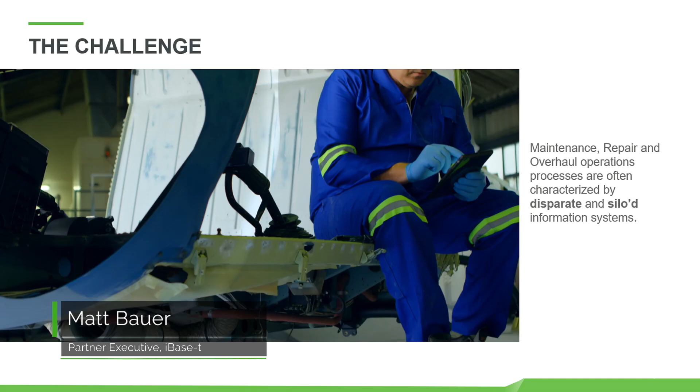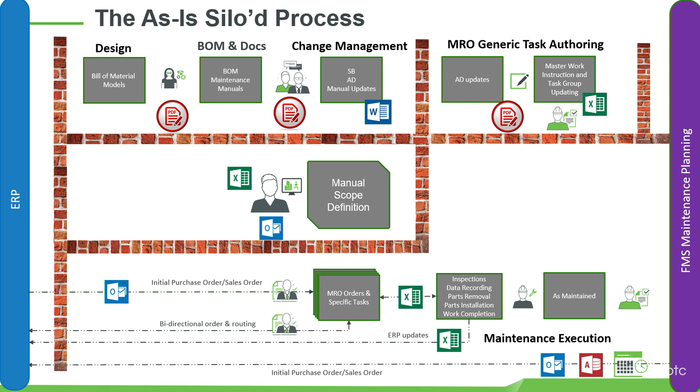The challenge faced by many MRO organizations today is essentially siloed, disparate information systems. It's not at all unusual that many systems of record are simply integrated through PDFs, Excel spreadsheets, and email messages, and unfortunately, when you've got this level of manual recreation and reentry of data, you get a lot of redundancies, which extends both the planning and execution phases of MRO. Inaccurate data leads to inefficiencies. This kind of situation can represent as much as 3 to 5% of MRO revenue today.

We worked with PTC to envision a solution that utilizes both portfolios in order to create smart connected processes that allow us to overcome the manual inefficiencies these organizations face. That solution is comprised of a combination of Windchill PLM, which is the product that manages the superset of tasks, requirements, certifications, etc., required to maintain the product.

It incorporates ThingWorx as a composite application, where we're using it to essentially mash up data from our Windchill PLM, along with data extracted from an FMS system or fleet management system that contains asset history and telemetry.

Our execution engine is Solumina. Solumina's job is to present instructions, enforce work procedures, and capture audit trails and all associated data that goes along with the repair operation itself.

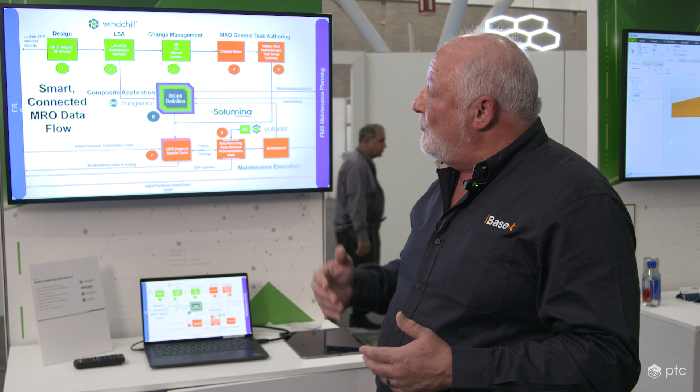When this change occurred, in this case we're going to be replacing magnetos on the engine, that kicks off a variety of activities. The first activity will be adding those instructions for removal, addition, and repair inside Windchill itself. That will kick off what we call a service bulletin, an indicator to all parties involved of how the instructions need to be carried out. In this case, because it's a safety issue, it's also going to be issuing an AD, or airworthiness directive, which is essentially grounding the airplane until that application is done.

So what we see up top in terms of the flow is that generic process plan of getting those instructions into Windchill itself, kicking off the service bulletin activity that updates the generic task planning. Those instructions have to be communicated to the execution engine, and it's done so in a generic way.

Once all of that activity is completed, we turn to a very specific application of the service bulletin for a particular tail number. That's where our scope definition application in ThingWorx comes in, combining the LSA BOM information with the FMS asset history to give us the specifics needed for this particular MRO operation. That is pushed to Solumina as a work order.

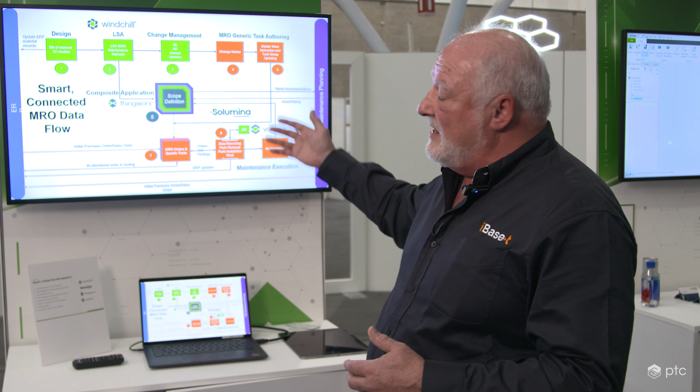And then all of that as-maintained information that's been updated in Solumina is made available back to the FMS or back into our composite application, so the as-maintained data can flow back into any application you desire. What you see here in the blue connected lines are actual integrations.

The red dotted lines in this case are integrations to outside systems, and you'll notice one purple line. The significance of the purple dotted line is that, in addition to being able to scope the actual application or repair operation, we can make recommendations back to the FMS. Think of it like an OEM giving you a notice that your car, based on mileage, needs the brakes changed. It's a similar concept, but it gives the MRO provider the opportunity to be more proactive in making recommendations regarding additional repair activities that might make sense during that event.

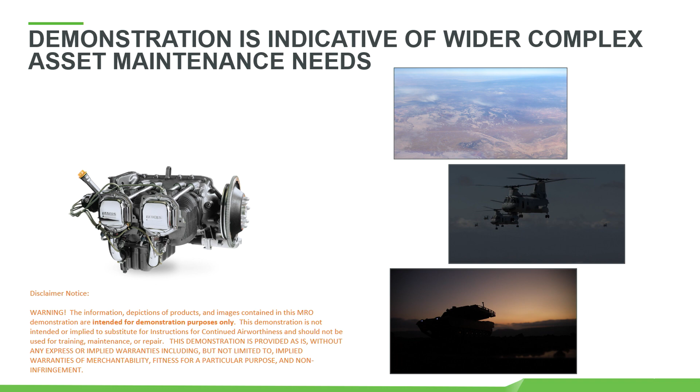So summarizing this down even more from the simplified data flow into essentially a breadcrumb trail: this will tell us where we're at each stage of the procedure I'm about to walk you through. This is all about the magneto replacement on a Lycoming IO360 engine. The fact that this is more of a civilian asset makes no difference from a procedure standpoint—the same processes and procedures are applicable in commercial aviation, federal, and defense aviation activities as well.

So the first step here is, now that the OEM has determined this repair procedure needs to take place, we're going to walk through updating the LSA BOM. What you see on the screen are just the steps you're about to see in the application when we run it. Everything in bold is the steps you're going to see. There are a few that aren't in bold that, for the sake of time, we're not going to go through, but you can assume they have happened.

So we're going to check the EBOM itself, work to include the design change, and analyze that LSA candidate to determine what we need to put into the LSA BOM. All the activity around task analysis, generating the KPIs, and creating task requirements we'll assume has occurred, and then we'll create our maintenance task.

You'll see that in the application. We'll create our task content, and assign any required tools, spares, and subtasks to the LSA BOM, so we have a complete record of everything needed to complete this repair. In the final stages, things like generating the technical publication or exporting the scope definition—we're not going to show that now, but those are all pieces of this process.

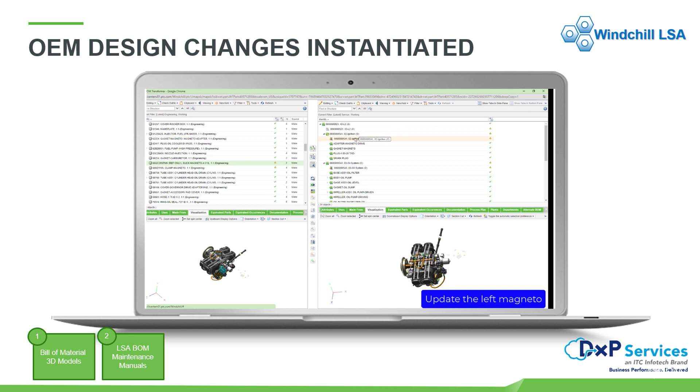So what you see right now is we're accessing the EBOM. We're hunting down the left magneto, and we're going to update it. In this case, we've selected that, and we'll now go through and begin to update the actual procedures. So there we've got the magneto defined.

We're now going to go in and identify all of the candidates that need to be changed as part of this process, going through and selecting the various tasks that need to occur. We'll then create each of those tasks within the application—in this case, entering the information regarding the oil filter change, the magneto change itself, and any additional operations that need to take place.

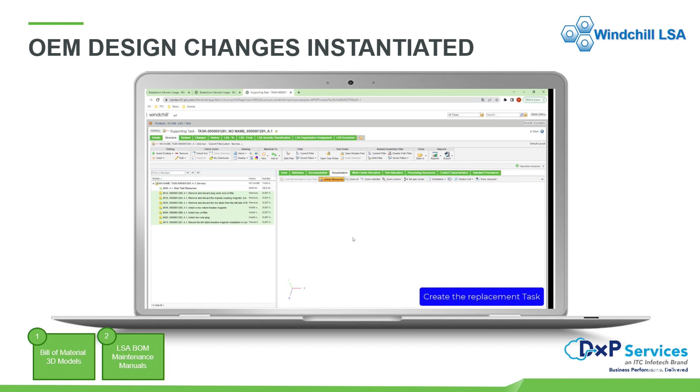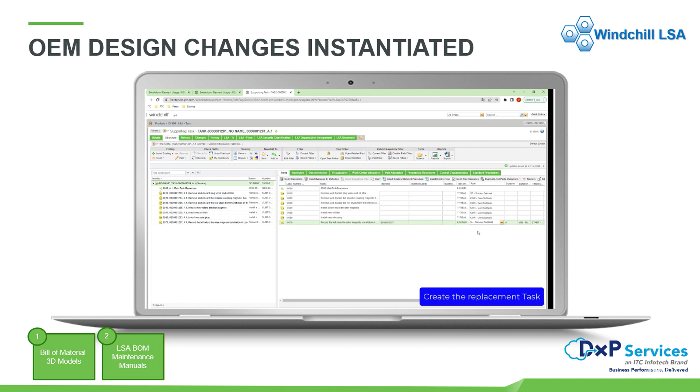We'll copy those—these are essentially the instructions for how to actually conduct the repair itself. So those are instantiated in the application. We'll identify the subtasks associated with all of these, so the complete record of what needs to be done is presented to the technician, creating the replacement task itself.

Now we'll be assigning the spares and tools associated with the magneto repair, essentially documenting each step, inputting the instructions, capturing all the information that needs to be captured, and adding the new tool—in this case, a smart torque wrench. We've now confirmed that all of that input has been successful.

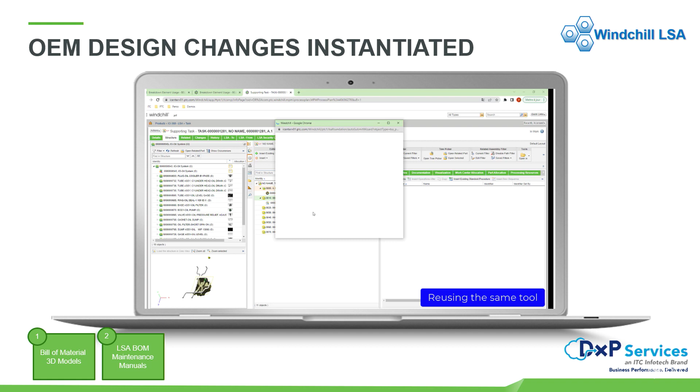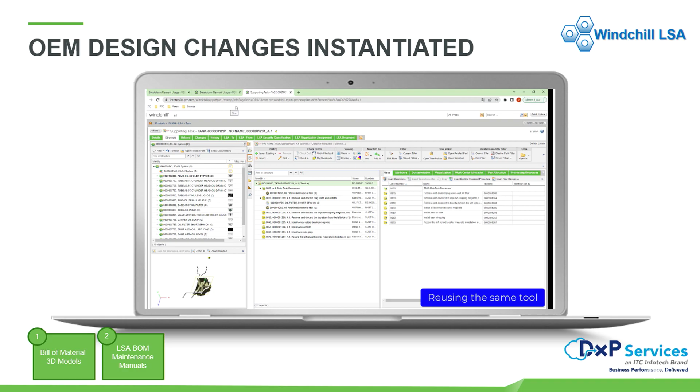We'll add another tool, essentially reusing some of that data the same way, and finalizing here in a minute. All right, so we're completed. Essentially what we've done now is update the LSA BOM with all the required tools and instructions—everything the technician needs to know in order to conduct the repair.

As a result of that, there's a service bulletin that's issued. The service bulletin is the detailed instructions issued by the OEM on how to conduct the repair. In this particular case, because it impacts a safety feature of the engine, the FAA gets involved, and an ICAD is issued.

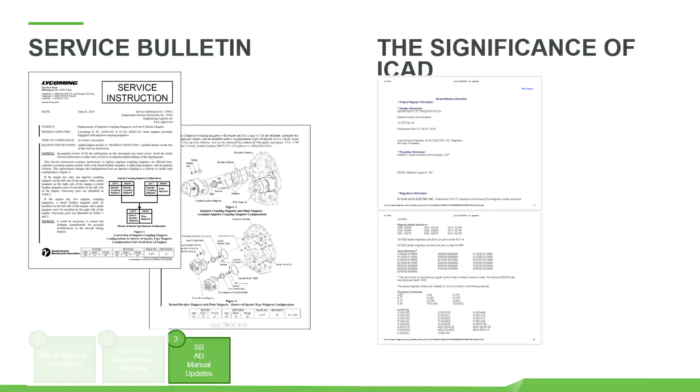The ICAD is an instruction for continued airworthiness directive. Essentially what that means is the aircraft would be grounded until that repair was completed. So there's a sense of downtime and timeliness to the repair that needs to be completed.

Once that service bulletin has been issued, Windchill issues a change notice to Solumina. Essentially, that change notice contains all the information necessary for Solumina to incorporate those task instructions, the generic task instructions on how to replace the magnetos, inside the execution engine itself.

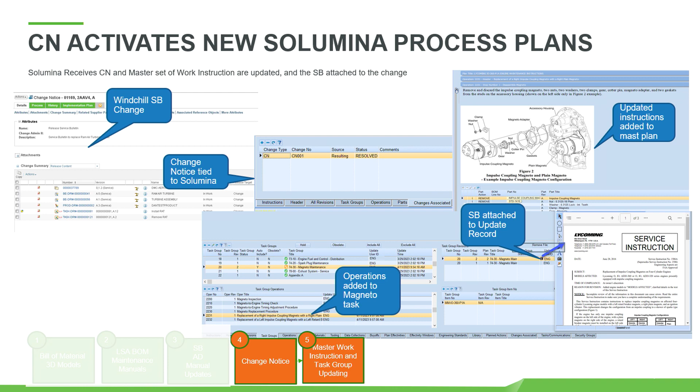So as we can see, the instructions have been added to Solumina in terms of how to conduct the repair, and our process plans have been updated in order to reflect all of the required operations that need to be completed, as well as incorporating the service bulletin itself for access by the technician.

So now that we've completed, if you will, the generic update process, the generic update of the LSA BOM in Windchill, the generic update of task instructions in Solumina, now we want to zoom down and apply those instructions or those repairs to the specific assets that have been affected.

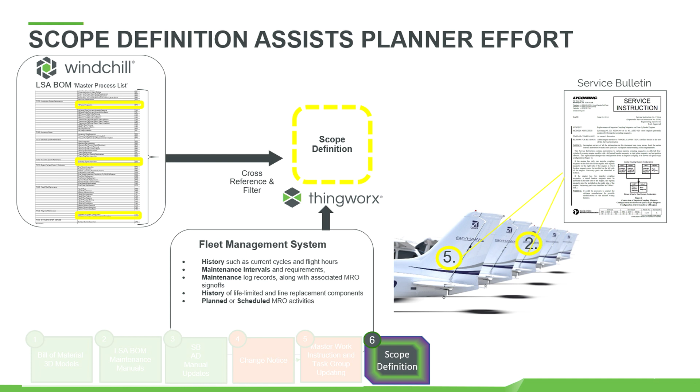In this case, what we know is that the LSA BOM is the master process list of everything that has to occur. In the fleet management system, we have a complete history, current cycles, flight cycles, flight hours, maintenance intervals, maintenance log records, a history of all life-limited parts and line replacement components, as well as any planned or scheduled MRO activities. So that service bulletin, we're now actually able to zoom in on the particularly affected tail numbers that are affected by this particular service bulletin.

So now we're going to step through this process of scope definition using the ThingWorx composite app. What you see here are just the steps that you're about to see in the application itself. We're going to refresh it first to display any of the upcoming fleet maintenance activities.

We're going to see that there are 4 upcoming events. Obviously, a service bulletin takes priority in this case. We'll select the affected tail number that's been identified. You'll see the macro information at the top of your screen.

You also see a display of all the line replacement and the life-limited items at the top of the page. We'll then drill down into each of the magnetos to show you the component maintenance history on each, so you can actually see what the maintenance history on these particular magnetos have been.

We'll then refresh the task group for that tail number, and that'll display our next set of tasks that are going to be required to be executed, and then we'll push that to our execution engine.

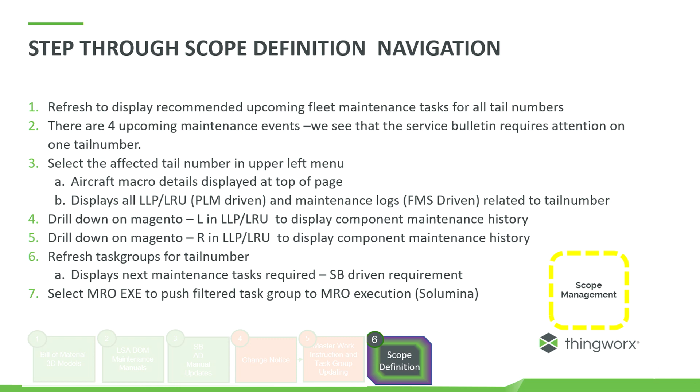Now this runs relatively quickly, so we're going to refresh the task groups. It comes up with our 4 events. We see the service bulletin. We're clicking on the affected tail number. We're then drilling down, essentially in each of these cases, into the particular item that we're looking for, which in this case is the magneto replacement.

And we can see that the history on the left magneto, when it was last replaced. We can also pick up the history on the right magneto. And then once we've seen what that information is, this is the task that we want to complete, we use the MRO EXE button there to push that information down into Solumina for execution at the MRO facility.

So all of those tasks have now been, if you will, the tasks that are going to be required. Could be some pre-tasks that are associated with the repair that makes sense to do at this particular point in time because of their condition or their flight hours, etc.

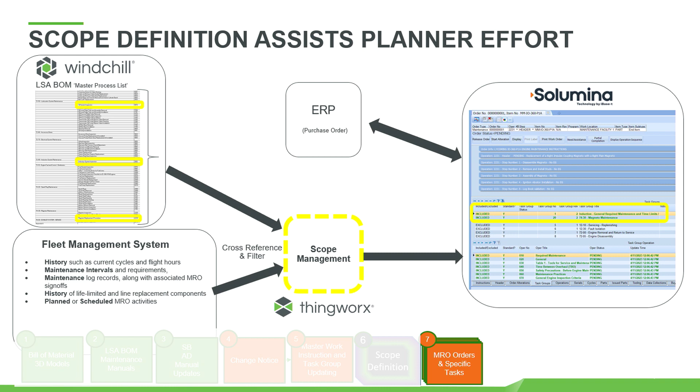All of those tasks have now been instantiated in Solumina, and Solumina then requests the work order from the ERP system in order to kick off the financial piece of the process as well, issuing a work order and preparing for the actual execution of the MRO event.

We're now going to move directly to what the technician is going to see during the MRO execution process. We're going to start with the right magneto, and then we'll work through the left magneto. The right magneto is the simpler of the two, and will utilize Solumina's work instructions in order to guide the technician through the process. So you're going to see him sign in into the application.

You're going to see that the service bulletin is available as a pop-up within the application. You can see the instructions for the removal and replacement of the right side magneto, the fact that we're going to collect a serial number. We're going to work through the steps of replacement.

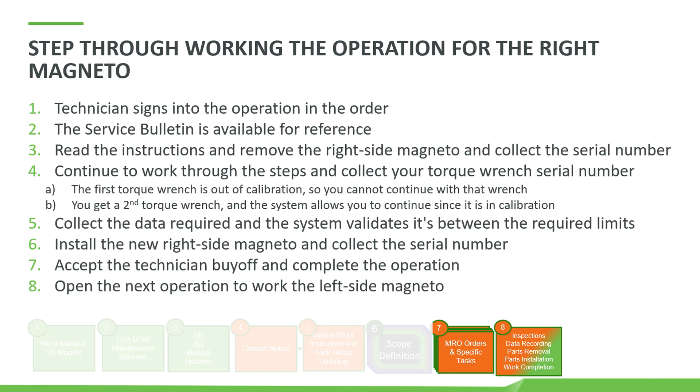We're going to utilize a specific tool. In this case, the first tool that's selected requires a calibrated torque wrench. In this case, the first tool that's selected has not been calibrated. The application will alert the technician to that, requiring him to pick a separate calibrated torque wrench, which is then used.

We'll collect the data from the serial number of the piece that went off, the serial numbers of the pieces that went in, and then we'll complete the buy-off process, and then we'll open the next step of the application, which will take us to the left magneto and introduce our AR experience.

So what we're seeing here is the operator has logged in. You can see the service bulletin is presented. It can pop up so that all the OEM instructions are available via the service bulletin, the official instructions, so to speak.

We'll now view the instructions for disassembly. We're going to capture the serial number. That serial number can be captured either by typing it in or by a scanning process, depending upon how you decide to enter the data.

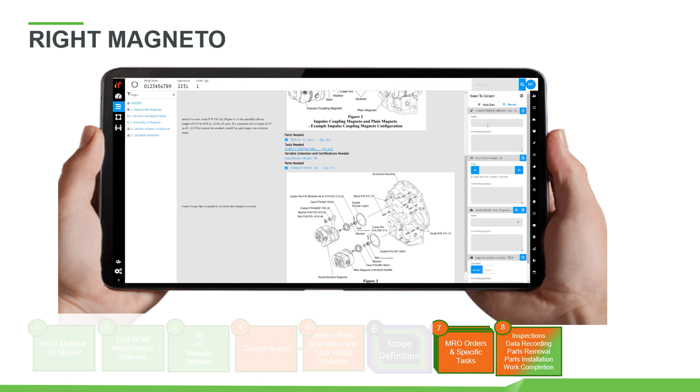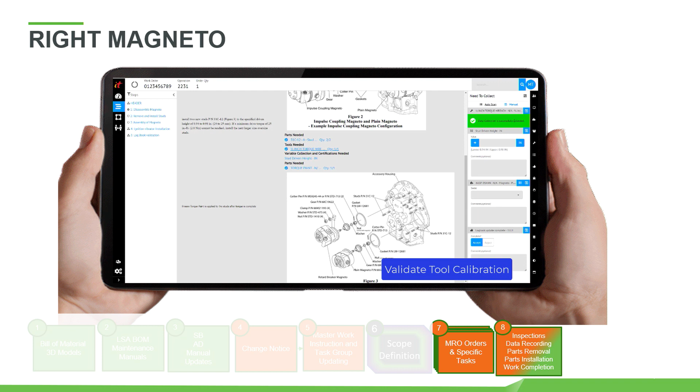We'll validate the tool calibration for the torque wrench. And as you can see, we just got an alert that the torque wrench is not calibrated. So we're going to now select a second torque wrench that is calibrated instead. There we go. And we got green.

So we'll now record the measurements, if you will, the key metrics from the torque wrench. Again, if it's a smart torque wrench, that could be collected automatically. It could be input by the technician at the point in time on the shop floor.

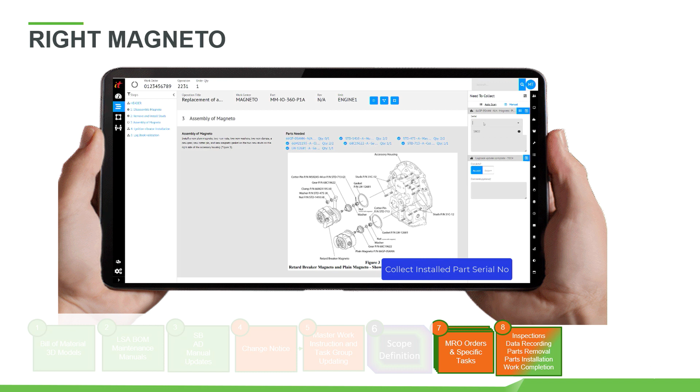We'll collect the installed part serial number that has been replaced on the unit, so we have a complete record of both removal and replacement of the parts, and we have traceability. And then we'll accept the buy-off right there. And now we've completed the replacement and all of the audited requirements of the right magneto.

We're now going to move to the left magneto, and we're going to use a different approach here in terms of guiding the technician. In this case, the technician has a barcode to scan or a QR code to scan. You can use an iPad, pull it up, and then we're going to see what the technician is going to be looking at.

All right, so the first thing presented to us is a picture of the engine and the tools required. This is what the technician would see looking through their phone or their iPad. Instructions are being provided in terms of the removal of the unit itself.

So visually, you can see each step of the process. The technician can see each step of the process and visualize exactly what needs to be done.

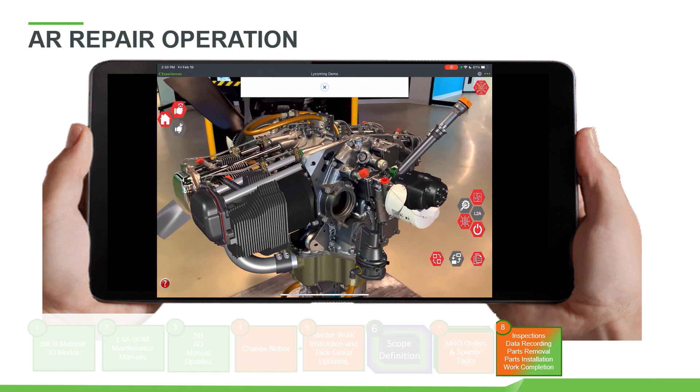The gaskets have come off, and now we're essentially going to put the new magneto back on. It's instructed us as to what tools to use for that magneto. We're now placing the magneto back on the engine, completing the process, putting the oil filter back in.

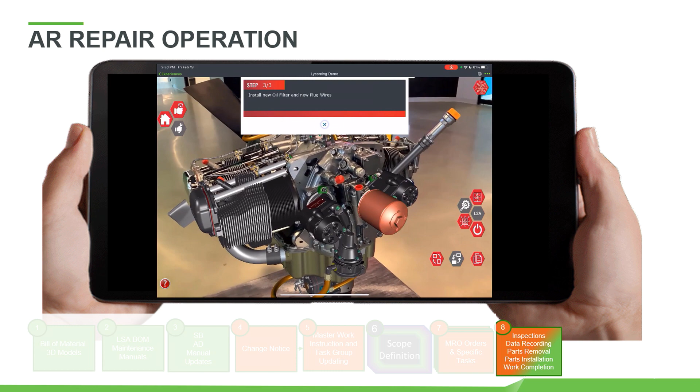And collecting the data, we notice that we've got the serial number that was removed, the serial number that was put in, the installed date—all of the required audit information has been captured as part of the Vuforia process. And again, that information is fed back into Solumina, so we have a complete as-maintained record of the entire MRO operation.

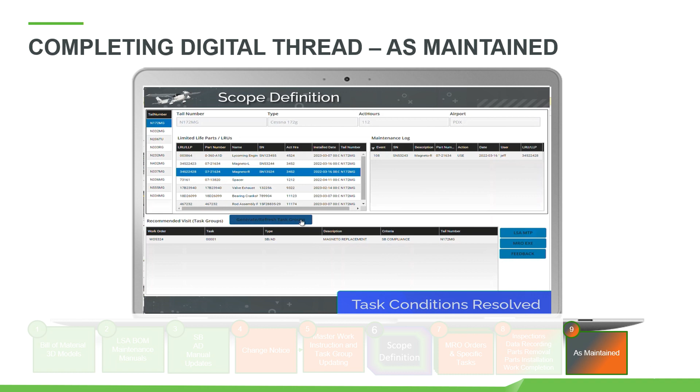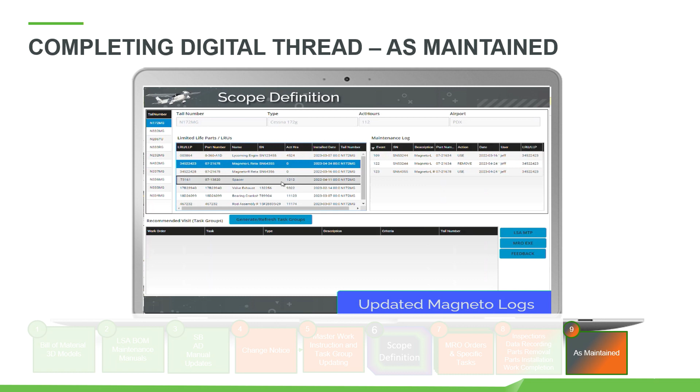Once that as-maintained data is back, what we're going to do is update—we can update the FMS directly, the fleet management system directly—and this information will go back into the ThingWorx composite app, updating all of the maintenance logs inside and essentially making that information available to any application that you would decide to store it in, in addition to the composite application itself.

As you can see, we've got the right magneto that was the original, the one that was removed, and the new one that has been put on. And so we've now completed all of those tasks. We'll regenerate, and we see that it is complete. So all of our records have now been updated with all serial numbers.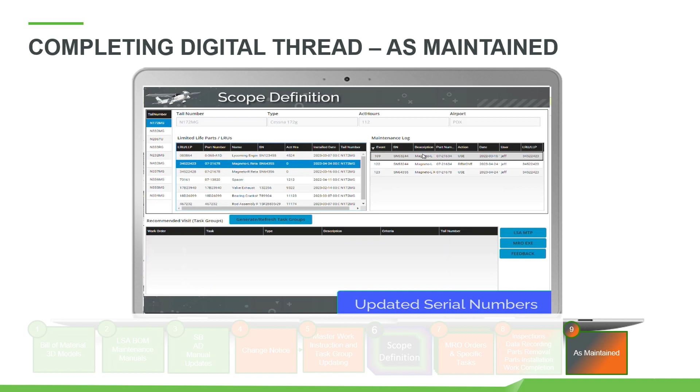So what we've shown you here today is a more integrated, smarter, end-to-end process from design and engineering all the way through execution and a return loop back. We're much closer—we're going to stay on track with our maintenance plans. We've, to a large degree, removed duplicate entry of information, etc.

We're getting essentially faster execution. We're getting the right information to the right person at the right time, in an actionable format, in order to complete that.

And the bottom line out of all of this is once you remove all those inaccuracies and manual effort involved in these types of activities, you can convert 3 to 5% of revenue, conservatively. That's not 3 to 5% of EBITDA, that's 3 to 5% of revenue that can be dropped down into the bottom line of the MRO provider in order to increase profitability. And that really is the productivity impact that you can see with a continuous digital thread. Thank you.